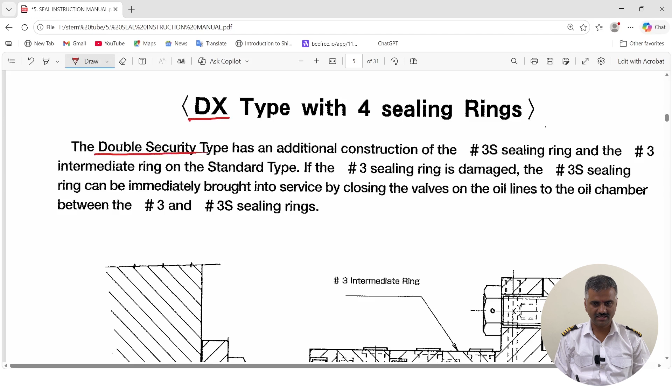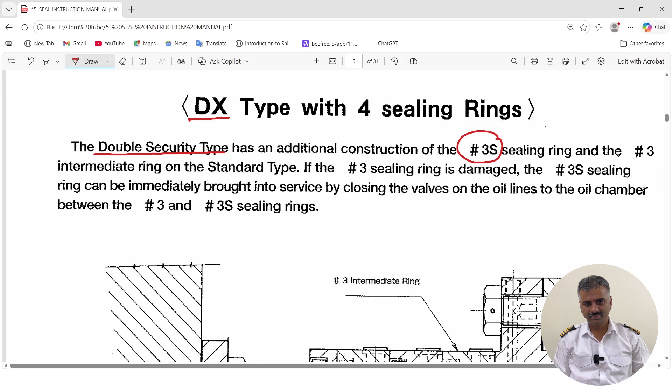So guys, now we will discuss the DX type of the compact sealing arrangement. So this is the DX new type arrangement, which is the double security type stern tube sealing arrangement. It has an additional construction of one more seal, that is called the 3S sealing ring, and the number 3 intermediate ring. So there is one more intermediate ring introduced from the standard type.

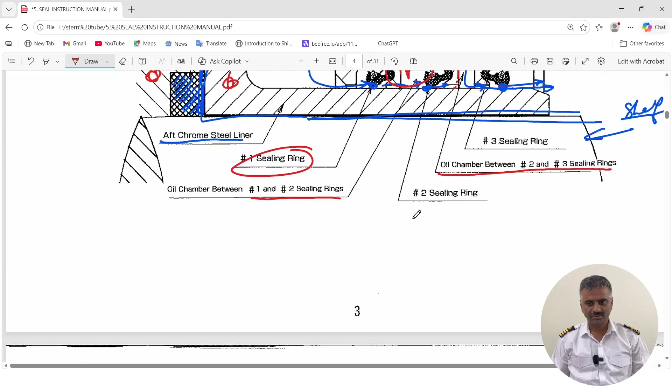In the standard CX type, earlier we had seen there were two intermediate rings, number 1 and number 2. To include one more seal, they have introduced one more intermediate ring, that is the number 3 intermediate ring, and one more seal is added.

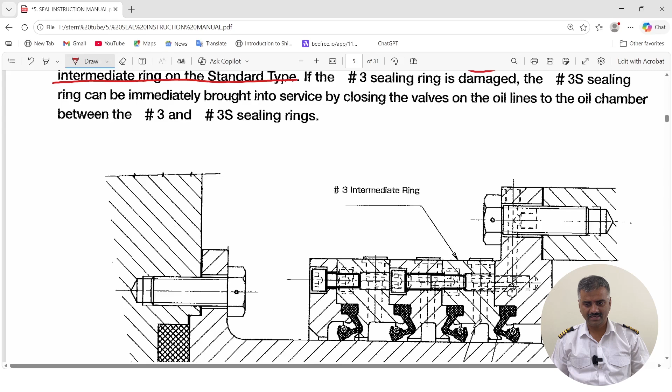Why is it done? Here is the answer. If the number 3 seal is damaged, the oil and water will have a tendency to leak out into the engine room. In that case, the advantage this double security presents is that you can close off the oil supply to number 2 and number 3, and you can open the oil supply to the number 3 and number 3S sealing rings.

So these are the two sealing rings, 3 and 3S, which will now act as your oil sealing, whereas this one will be closed off. This can be used for oil sealing now. So if your number 1 seal leaks and water comes in, and in that case your number 2 also leaks and water has come inside this section, to make sure that there is no further increase in pressure, because oil is there, the oil will additionally add to the pressure.

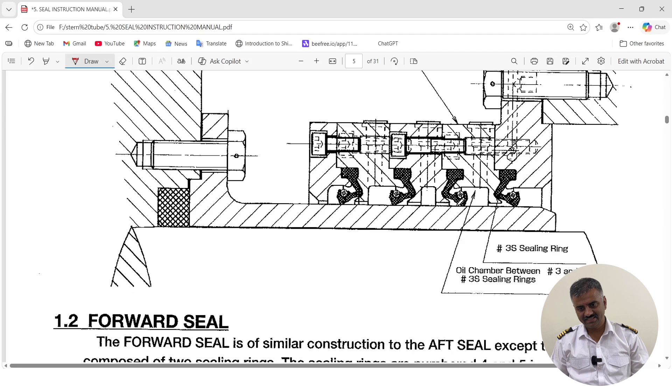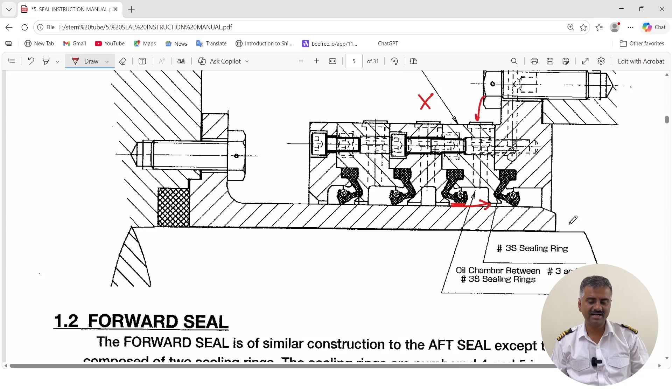To reduce the pressure on these sealing rings, to minimize the leakage, and to avoid any more sealing ring leakage into the engine room from the number 3 side, you will just close off the oil supply here and give the oil supply in this section. We will see that in detail in the next section, but this is the basic purpose. How the oil supply is done, you will see in the coming sections.

So if the number 3 sealing ring is damaged, the number 3S sealing ring can be immediately brought into service by closing the valves on the oil lines to the oil chamber between the 3 and 3S sealing rings. So the oil chamber valves will be closed for this and open for this.

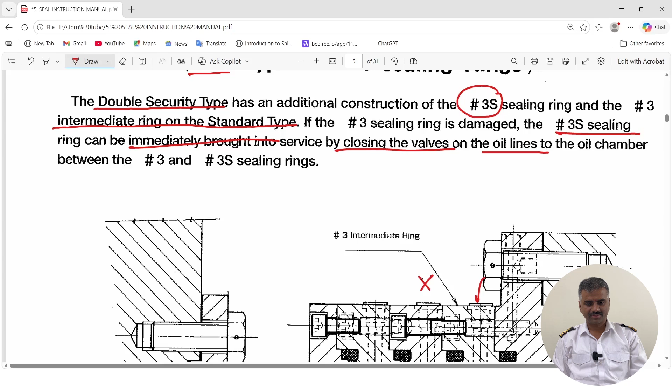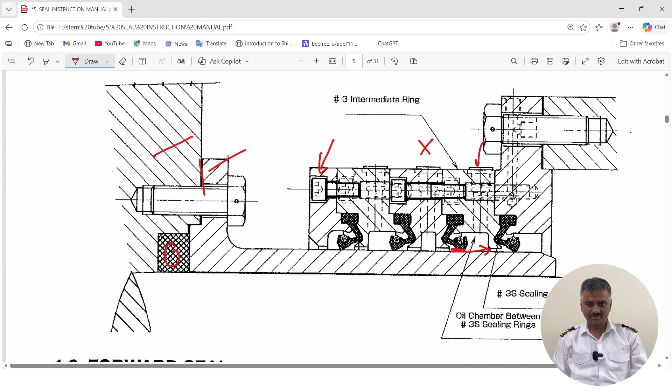The assembly you can see is almost similar to the previous one. You have an O-ring here, a bolt fitted here, this is the chrome liner, this is the propeller boss, and this is a packing here. This chrome liner rotates with your propeller because it is directly connected to the propeller, and your seal assembly is static. This one is a split sealing ring, and then there are separate intermediate rings, 1, 2 and 3. So one more intermediate ring has been introduced in the DX type sealing arrangement, the last one with more oil holes.

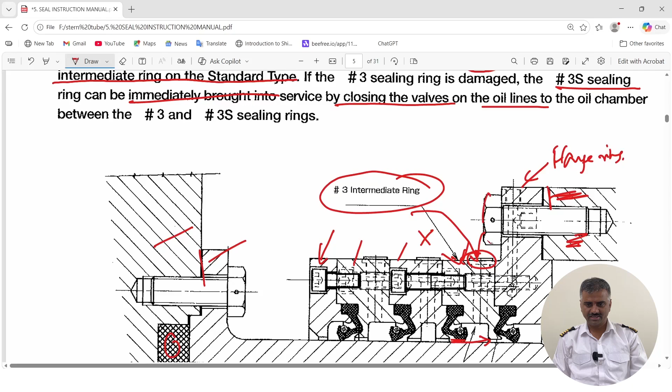Okay, this is connected with your flange ring, which is attached to the stern tube. So this is your stern tube, this is the flange ring attached to the stern tube, connected with the bolting arrangement here. This is how it is connected to the, so this section is the section of the ship where it is connected to the stern tube. This is the chrome liner.

So let me show you a very clear pictorial representation video of this, so that it will be very clear to you how the KEMEL CX type and DX type assembly looks like. So CX type and DX type is basically a similar assembly, only one more seal, an extra seal 3S, to give you more security, double security. The DX seal has been introduced. So let me play the video for you.

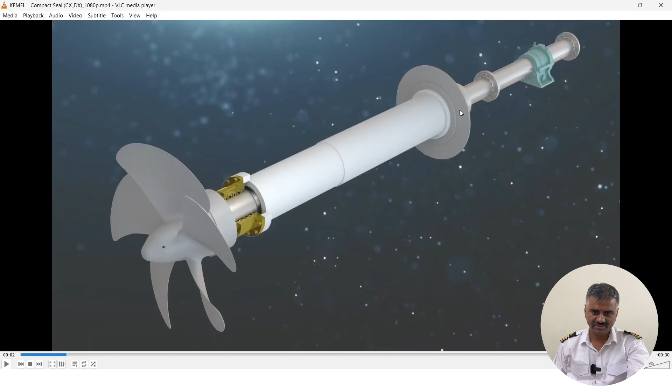So this is the KEMEL compact sealing arrangement. The representation that you see here is a shaft, okay, this is your main engine shaft, this is your propeller shaft. From here, this assembly on the cover is your stern tube. Okay, this is your intermediate shaft bearing, this is your stern tube, a hollow tube, and this section we are talking about is the assembly where it is connected with the flange ring and the stern tube here.

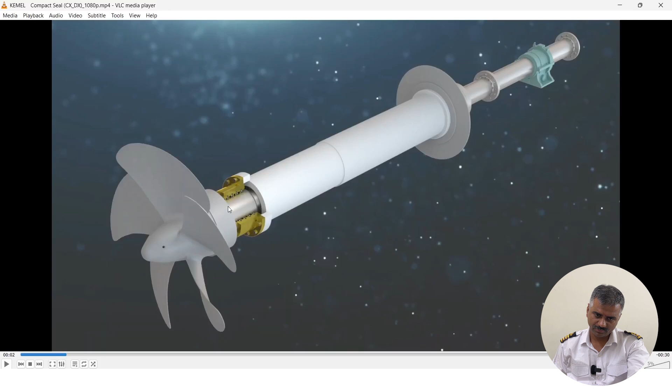This is where the vessel stern tube is connected to the stern frame here. Okay, so from there the section is outside into the sea. This is your propeller boss, and this end of the stern tube is connected with the propeller boss, and there is a chrome liner. This is the chrome liner on which the seals are fitted. This chrome liner is continuously rotating with the shaft and the propeller, whereas these seals are continuously rubbing on the chrome liner.

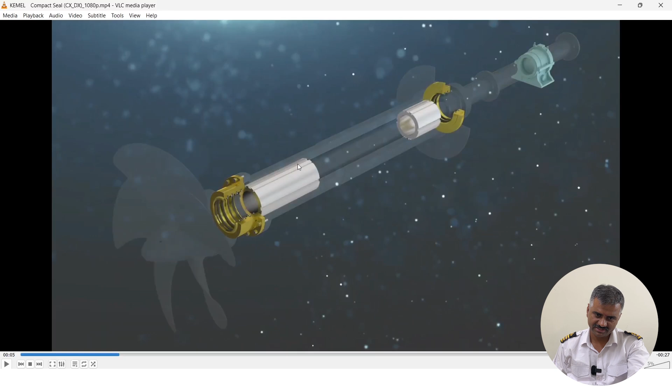Okay, let us just see more. So this is the sectional view. You can see the stern tube has been shown here, there are two bearings. This is the aft stern tube bearing, this is the forward stern tube bearing. Now you see, this is the aft stern tube bearing, this is the forward stern tube bearing, this is the forward seal, this one is the aft sealing assembly. This is the DX type. Actually 4 sealing rings are shown here, 1, 2, 3 and 3S.

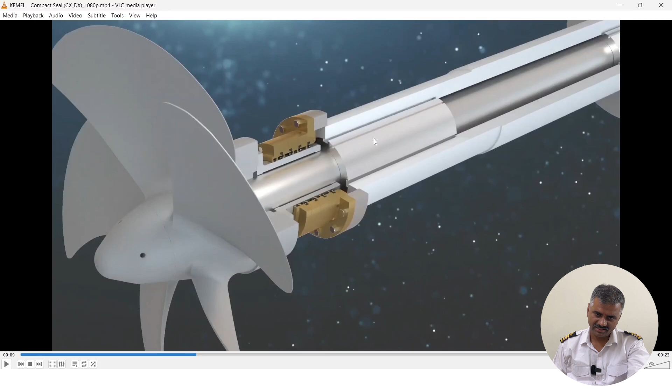As we look more closely, you can see more detail. So this part is the propeller boss part, this part is your chrome liner, this part is your seal casing. Okay, aft seal cover connected with the flange ring. The flange ring is the end ring, and this is connected to the stern tube. This is the bearing. Okay, this one here is your stopper O-ring that we had seen before, the O-ring in the forward part, that is the first O-ring.

This one is called the net stopper. The net stopper basically ensures that if any net or something gets entangled, it does not harm the stern tube. Otherwise, the net will pull out or cause disturbance in the stern tube assembly. So there is a net stopper to allow the net to be retained until this place.

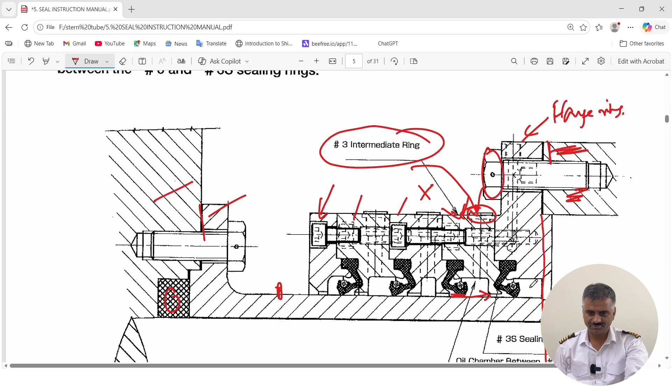So you can see this is the O-ring, the first O-ring that we had talked about. Let me compare. So this is the O-ring, first O-ring. There is a net stopper here, not shown in this photo. And then come the sealing rings. So this one is your net stopper, this one is your chrome liner. If you see here, this one is your chrome liner.

This is your cover ring. Cover ring means the first ring. Okay, the cover ring here is this one. This one is your cover ring, split cover ring, which can be opened up into two parts, segments we have already seen. Then comes your intermediate rings: number 1 intermediate ring, number 2 intermediate ring, number 3 intermediate ring.

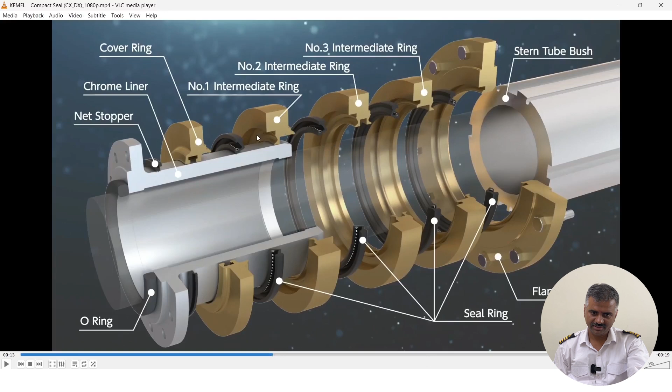As you can see here, number 1 cover ring, then 1, 2, 3. There are 3 intermediate rings which are interconnected, and there are holes in between. You can see this. These are the 3 intermediate rings, and these are your seals. These are the seal rings, lip seals with the rubber rubbing onto the chrome liner, and you have a garter spring to press it on the liner.

Okay, 1, 2, 3, 4. 1, 2, 3 and 3S. So this is 3S in the DX type assembly. The stern tube bearing is also called the bush because it is a bush kind of assembly. Okay, stern tube bush assembly. This last ring is called the flange ring. Okay, cover ring, flange ring in the end, and other intermediate rings in between.

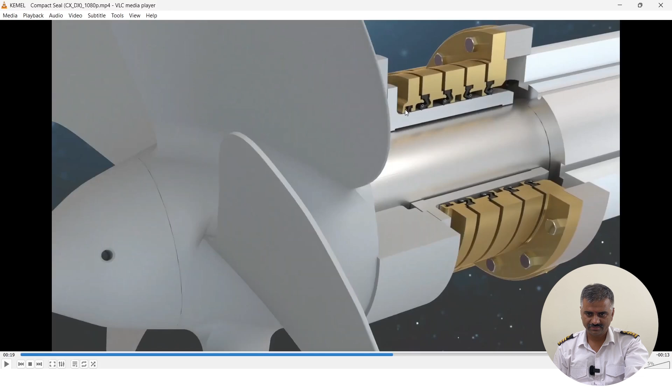You can see now the assembly is being connected again. Okay, this is how it is connected. This one is your net stopper, the first one here. Okay, so this is how it comes out. The first one here in the cover ring is your net stopper. Okay, net stopper, and the others are the sealing rings, and the first one here is the O-ring.

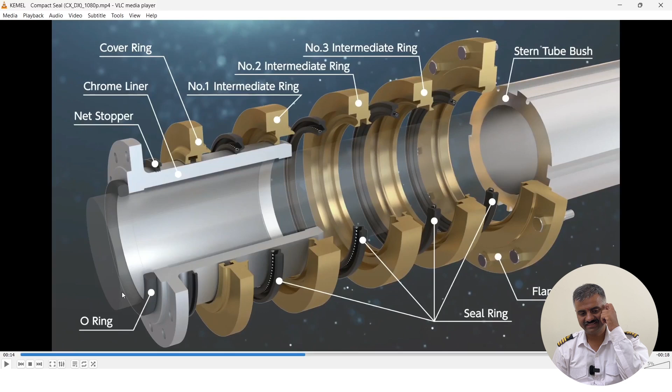So any nets, that is also very important. If any net gets entangled, to avoid that net causing any harm to other sealing arrangements, you have an earlier sealing ring assembly here called the net stopper. In the standard diagrams you won't find this.

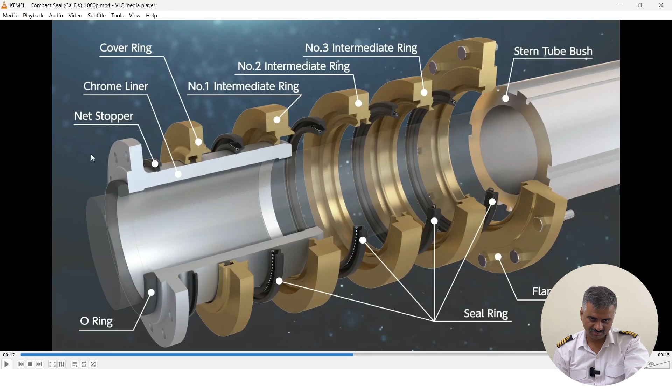This O-ring is for any hydraulic, say stern tube oil leakage from this part, from the chrome liner. Inside the chrome liner, if oil is leaking out, because the internal section of the chrome liner here for the bearing lubrication is completely filled with oil. If oil starts leaking from here, this O-ring is there to protect.

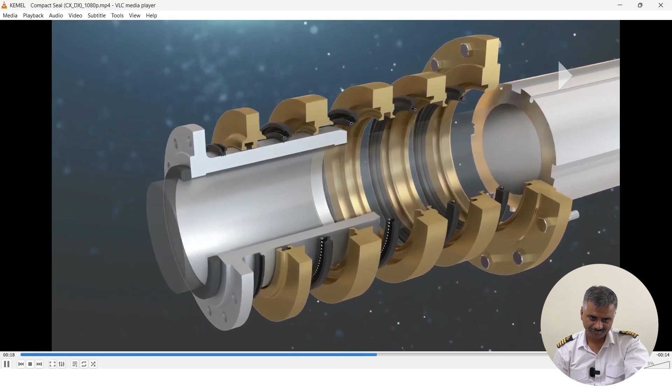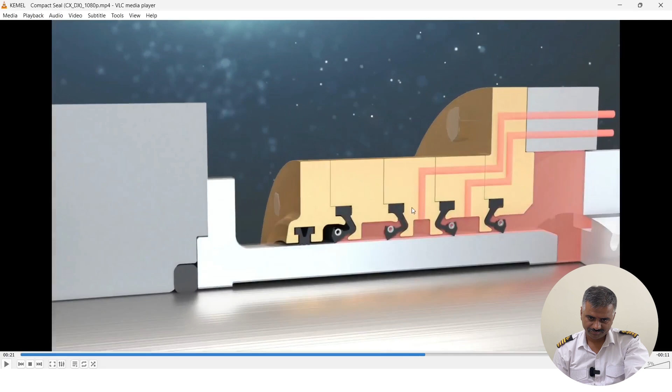You can see this is the O-ring that we are talking about, coming in between these two. If you compare the diagram, you can directly relate it. This is the propeller boss, and this is the chrome liner. Okay, this is the net stopper. These are the sealing rings, 1, 2, 3, 4. These are the intermediate rings. This is the casing ring, cover ring, and this is the flange ring, the last one.

Okay, stern tube oil is supplied. Through the plug hole between 1 and 2, you can supply oil. In between the sealing rings, there is oil going in from the stern tube system itself. You can see stern tube oil is filled inside here. This is the stern tube oil, and through these two pipes also.

So say your oil starts leaking, number 3 seal starts leaking, and oil and water have come in until here. To reduce the pressure on this seal, you close this line and open this line. That is why this double security sealing arrangement is given. Open this line for further lubrication and close this line. This is your sealing arrangement.

The KEMEL oil seal is equipped with an integrated spare seal. This is the spare seal, 3S. In the event of oil leakage from the oil side ring, number 3, due to any cause, the spare seal can be activated through a simple valve operation. There is a valve given here, it can be changed over to the other section, allowing continued safe use for an extended period of time.

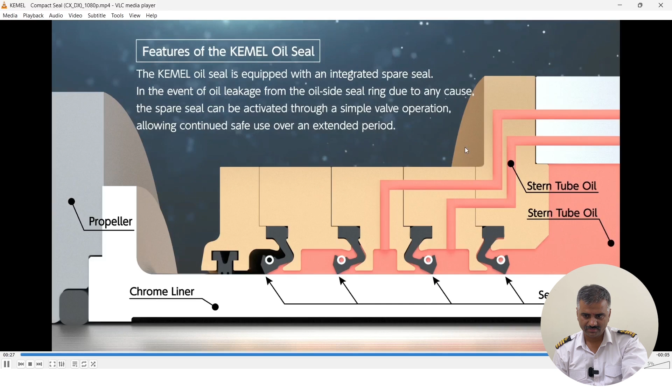Okay, this is the purpose and explanation of the KEMEL CX and DX type sealing arrangement. In the next section we will study more about this.